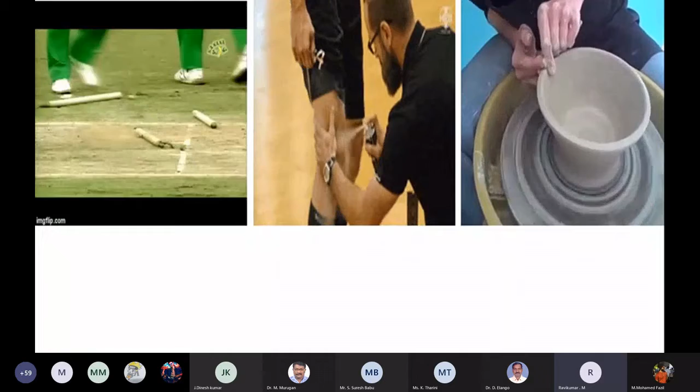So henceforth, your concentration should be more towards - not only towards the strength parameter - you should always focus towards ensuring or achieving the durability. Friends, another important term that I want to bring during this discussion or journey under this topic is serviceability.

And the quality. Friends, please keep in your mind the term quality is not only belonging to site execution. Friends, the term quality is quite common, or it should be ensured from your drawing room itself.

Because I want to recollect that the language of civil engineers is through drawings. So the communication between the designers or between the detailings and the site execution team will be through drawings only. So therefore, please keep in your mind, my dear young boys and girls, that drawing is the language of civil engineers.

So if you are able to deliver - I'm using the word deliver - with whatever detailing you have learned in your classroom, starting from engineering drawing in semester 1 or 2 till your 8th semester building drawings, then those are the things that are going to help you create more wonders in terms of whatever different types of structures you are going to deal with.

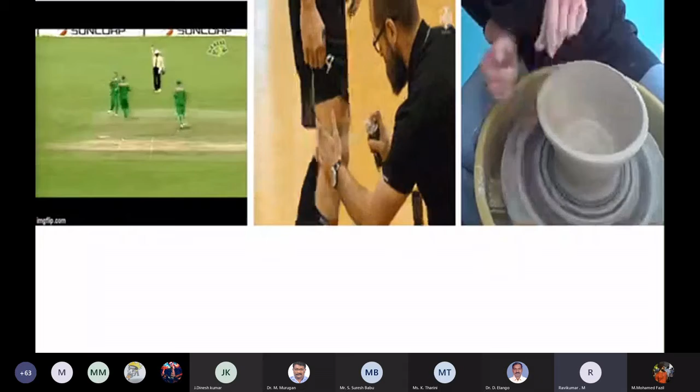So henceforth, after this journey in the next 1 hour under this topic, I always recommend to all my young engineers to study reinforced concrete design, steel design, or the creation of cross sections or detailing for buildings. Please refer to the respective code book, which should be parallelly referred. It may be IS 456, or it may be SP 34, which is the code that deals with reinforcement detailing.

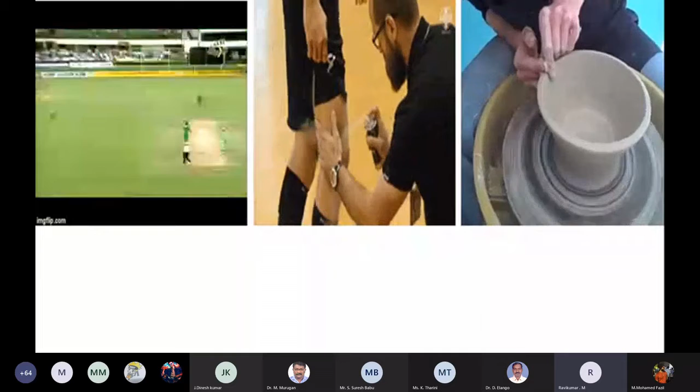So henceforth, I always say the students who spend more time in 2 L's - one L is for library and another L is for lab. The students who spend more valuable time in the library and the lab will be shining like anything, and they will be welcomed by the industry with a red carpet when you come out of your 8th semester, because the industry looks not only for marks.

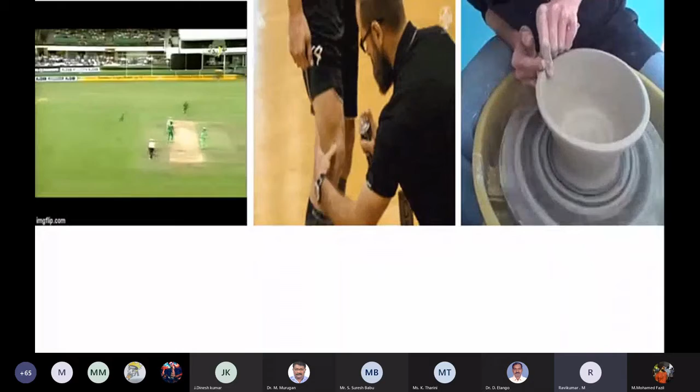The industry looks for skilled engineers. You should be skilled enough. When you come out as a product, you should be skilled enough to meet the industry. Industry doesn't want you to create wonders from day one. The industry expects every engineer coming out of engineering colleges to have the basic skill. So if your foundation is very strong, you will definitely shine in whatever field you enter.

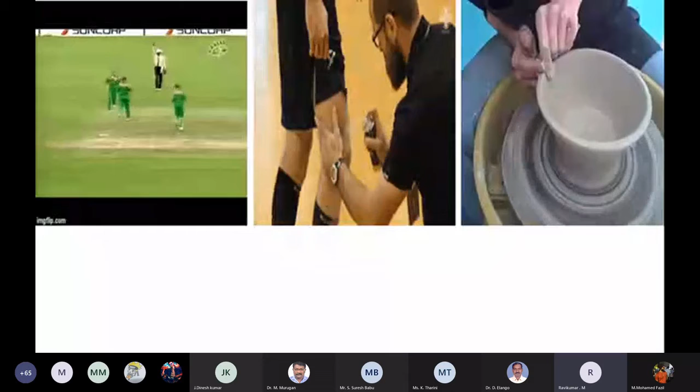So friends, with this brief introduction, I welcome each one of you to my session, Walk into Repair and Rehabilitation of Structures. Friends, in the first slide, you have 3 GIFs - one is a run out, another one is healing a sprain, and the other one is creating an object.

Friends, please keep in mind, under this topic of repair and rehabilitation of structures, you have to be very quick in identifying the problem. The timely identifying of the problem and timely curing of the problem will always ensure the design life period of the structure.

What is the design life period of a concrete structure? Can anyone say? Can anyone open the mic and say, please, my dear friends? Madam, can I raise this question to your students? Okay sir, with your permission, sir. Okay sir, okay sir.

Friends, what is the design life period of a concrete structure? A student responds: 50 years, sir. Don't feel shy, you should come forward whether wrong or right. See, the design life period of a concrete structure - earlier in the 1960s, 50s or 70s, the design life period of concrete was assumed as 50 years.

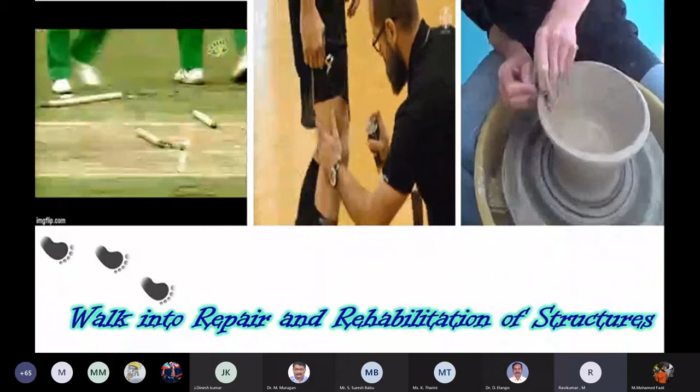Now we are designing bridges, infrastructure in front of your colleges, all the highway structures, bridges at the Vandalur junction flyover, even at the other rotary section at Tambaram, Sriperumbudur. I'm giving these examples so you can correlate, because every day you are crossing all these highway bridges.

So all these have been designed for a 100 years period. So if you want to retain that structure for 100 years of service period, your maintenance has to be ensured precisely. Maintenance means routine maintenance, periodic maintenance, and special maintenance.

So what is repair? Friends, these are two different terms - repair and rehabilitation. We should never mix these two terminologies. Friends, as an engineer, you should be in a position to differentiate, by seeing the distress or deterioration in the concrete, whether it requires repair, or rehabilitation, or a combination of both.

So what is repair? How can you differentiate these two terms, repair and rehabilitation? Repair is the process of restoring something that is damaged, deteriorated or broken to good condition. Friends, it is just something like you are sealing it. If you see a crack on a wall or a beam, you are going to seal it. You are not going to add any value addition in terms of strength. So repair is a process where you are restoring it, sealing the damage or deterioration and bringing it to good condition, that's it.

Now, whereas rehabilitation is the process of returning a building, a bridge, or any structure or area to its previous good condition. In the process of rehabilitation, you are involved in adding strength to the component, whether it's a beam, column, foundation, or slab. So when there is a process of adding strength to the structural components of a building, a bridge, or steel, that process is called rehabilitation. In both repair and rehabilitation, you are going to bring the structure back to its good condition, and it has to meet its intended design function. That should be ensured.

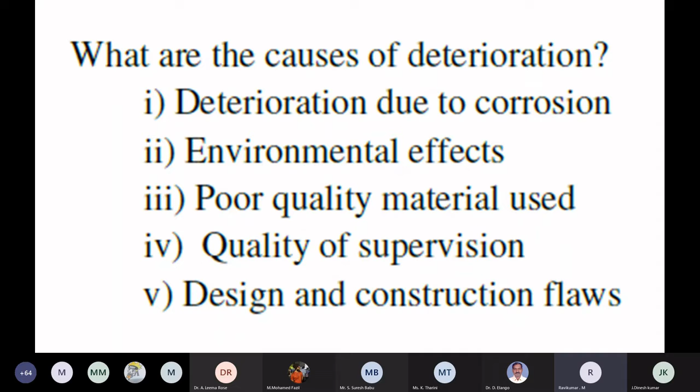So the first step is physical inspection. Please never make the mistake that even with 20 or 30 years experience, without inspecting the site, just by hearing the data or seeing photographs, you come to any conclusion. Please do a minimum of one visit. Spend adequate time at the site, understand the problem, understand the configuration and every detail. A minimum of one to two visits is essential.

Number two, preparation and documenting the damages, collection of samples, carrying out tests both in situ and in lab, studying the documents including structural aspects, estimation of loads, and estimate of environmental effects.

Sometimes you may be involved in designing a structure without understanding where the building is going to be executed, whether close to the seashore, close to an industrial area, in seismic zone 3, 4 or 5, or what the wind speed is. The designer has to be very thorough with all these details, and also where the foundation is going to come.

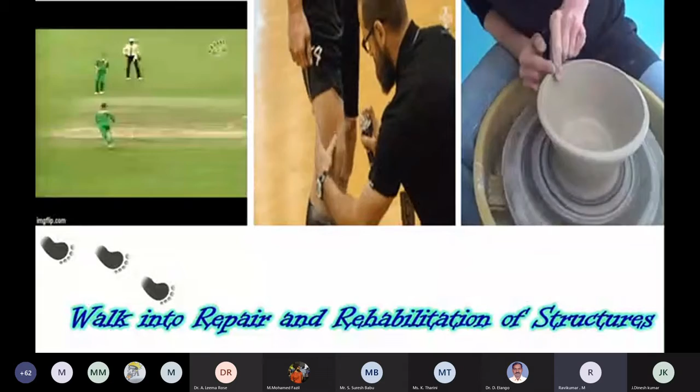But the cost, friends, is why I have shown this in the front slide. The third point is like pottery making - repair and rehabilitation is an art, A-R-T. It is a serious business, because you are going to retain the structure and bring it back to good condition, ensuring its intended design function. So costing plays an important role.

If the cost is exceeding, then sometimes you have to go for demolition and reconstruction, partly or fully.

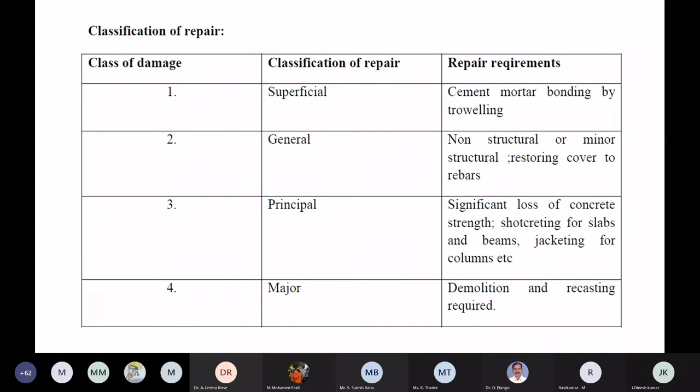Next, repair and rehabilitation of structures are carried out in the following stages: removal of damaged concrete, pre-treatment of surface and reinforcement, application of repair material, restoring the integrity of individual sections, and strengthening of the structure as a whole.

See the following factors to be considered while repairing concrete structures: one is the cause of damage, the source of why the problem is coming; then type, shape, and function of the structure - that is the configuration, load distribution, and purpose of the building.

Each and every data collection has to be ensured. Then the capabilities and facilities available with the builders - friends, you cannot tell customers that you can only deliver this much costly remedial measure and no less. You have to consider the capacity of the customer, what materials are locally available, and what mechanisms exist with the existing system. You have to come out with an effective repair and rehabilitation methodology that can work at site.

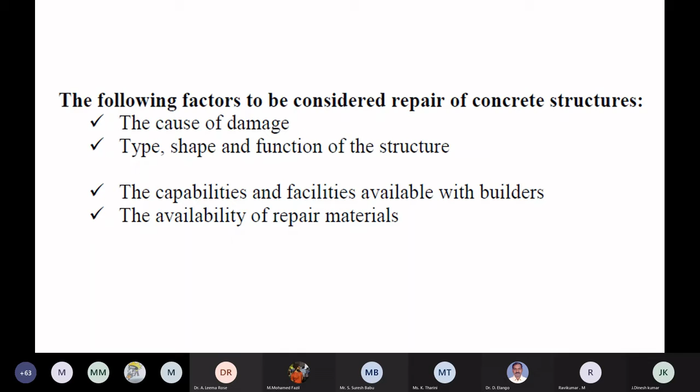Finally, the availability of repair materials. You cannot say you have to import - nothing doing. You have to develop a scheme that can work effectively within the data or system available.

Now I'll bring out some salient points in the concrete repair procedure: determine the cause of damage, evaluation of damage, identify the need and method of concrete repair, and application of the selected repair method. Friends, when developing repair or rehabilitation methodology or a combination of both, you have to develop various options with reference to cost.

There should not be any inadequacy in workmanship. Whatever step-by-step procedure you are evolving has to be ensured at site by the engineer in charge.

Then the method of repairs - as I said, not all cracks are structural cracks. Some cracks may be dormant cracks - even though there is a crack, it may be a facial crack with no impact on durability, serviceability, or safety of the structure. Some cracks may be active.

That means it does not remain constant width but opens and closes - whenever load comes, the crack may open and close. We call that active cracks. Another type is growth cracks, where the width keeps increasing with reference to time.

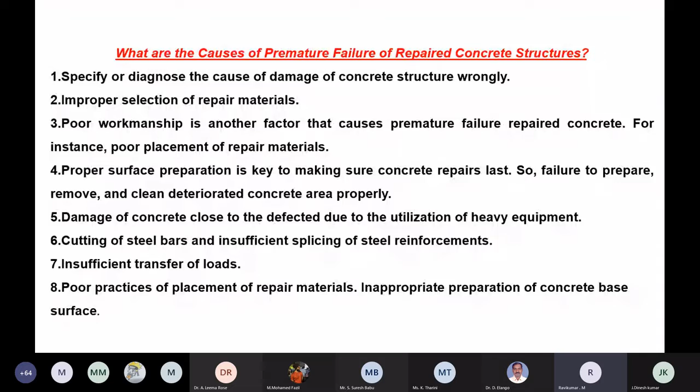Now, how does deterioration occur due to corrosion? One is spalling of concrete cover, cracks parallel to reinforcement, spalling at edges, swelling of concrete, dislocation, internal cracking, and reduction in area of steel reinforcement.

Sometimes you can see the crack developing along the reinforcement. Suppose in case of a column, the crack may develop vertically downwards, meaning it develops along the main bar. Sometimes circumferentially also, that means along the stirrups. Even in a beam, along the main bar, that is perpendicular to the neutral axis or parallel to it, the cracks may develop.

Sometimes the spalling of concrete may take place. So when you look closely into the exposed reinforcement, the rebar may be corroded. Because friends, when corrosion starts in the reinforcement, the volume increases 5 times. So when the volume of the steel increases due to corrosion action, tension is developed along the length. Because the concrete is weak in tension, the crack develops along the length of the bar. And since the volume increases due to corrosion, it pushes the outer concrete, that is the cover concrete. That's why you are seeing the spalling.

Now we will see a small video. Friends, if you have any doubt, you can please put your questions in the chat box, or you can raise your question at the end of the session. We will see a small video that will help you understand the process of corrosion, because corrosion is an electrochemical process.

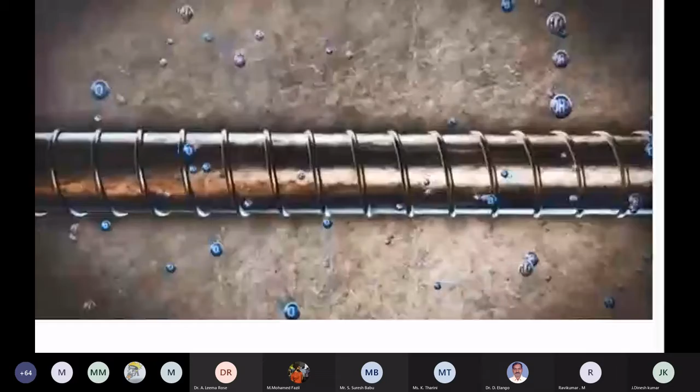See, I'm just keeping silent, okay?

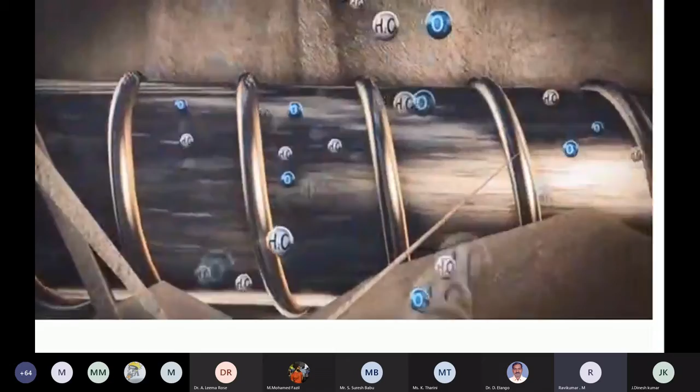So, the volume of steel increases due to the corrosion action, and it pushes the cover concrete, and tension is developed along the length of the corroded bar. So immediately cracks develop, and as the volume increases, it pushes the outer concrete. So you will be seeing cracks and spalling of concrete. You see, now the concrete has spalled out, due to the action of corrosion.

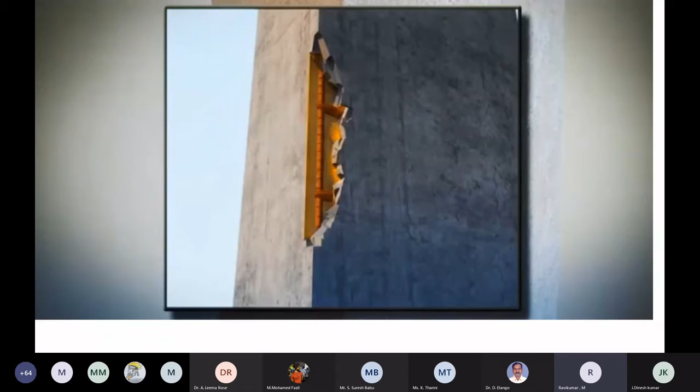I hope this video would have helped you understand better about the corrosion. Now the next thing is about the carbonation effect. What is carbonation effect? It is the effect due to carbon dioxide.

My dear friends, the pH value of the concrete is just like your immune system. In the present situation, you are being advised to keep your immunity high to protect yourself from microorganisms or infection. The same way, the pH of the concrete protects your structural steel which is embedded within it, from environmental effects or from the carbon dioxide effect. The new concrete will have a pH value of 12.5 or 13.

But once your concreting is completed and the shuttering is removed, it is exposed to the environment or atmosphere. So from day one onwards, the environmental effect will keep attacking your concrete surface, first attacking the surface concrete. If you are not maintaining a uniform cover all along the length of the bar on all sides of the member, wherever the cover is inadequate or less than the designed required cover, those areas will get affected very easily, and the rebar will corrode easily.

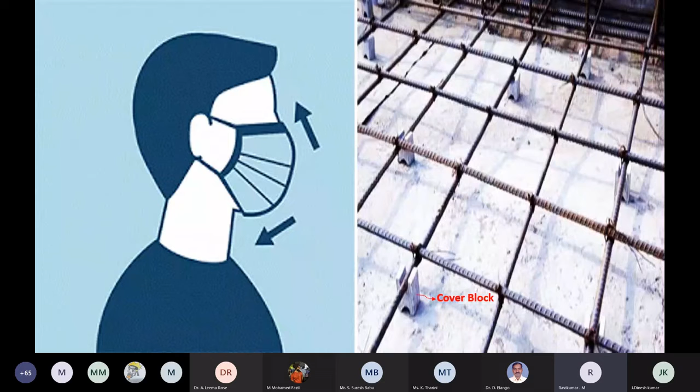When you are providing your cover block adequately at the adequate location, then your concrete will not be easily affected by the environmental effect. Whereas, even though you are wearing a mask, but partly wearing and partly exposed, you will be easily infected by microorganisms. The same way, even though you provide cover block, if it's not at adequate locations or numbers, and not maintained uniformly, at some location 40mm, 50mm or 30mm is maintained, at some location it's only 10mm or 5mm, then those areas having very less or inadequate cover will easily get infected and the problem starts.

You can see this, how the rebar are getting corroded.

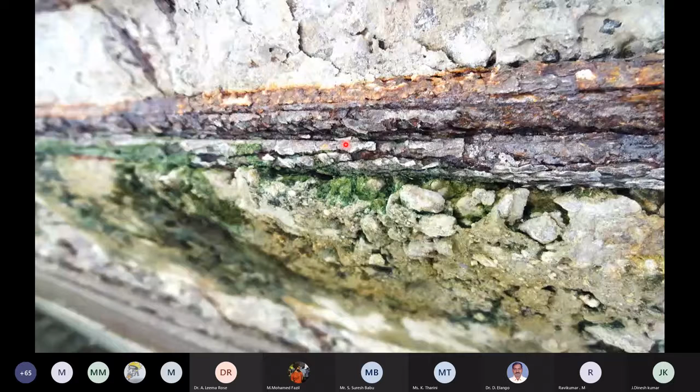See, you can see here. Sometimes you may see a peeling of concrete. If you just take a small stainless steel scale, 1 foot scale which you use in your drawing room, and push it into this peeling concrete, you will see the exposed corroded bars. You can see crack development along the reinforcement.

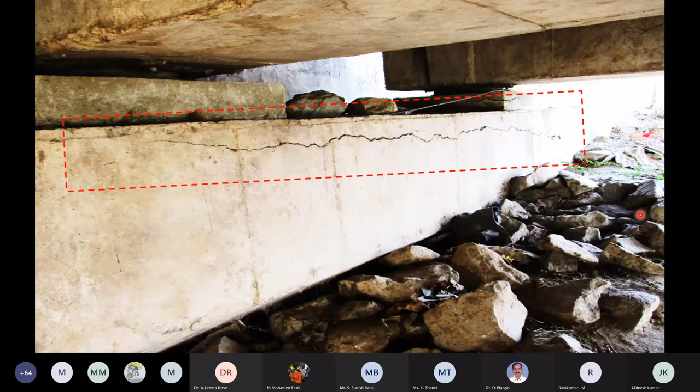The next problem is leaching, sometimes called lime weeping. It is caused by water leaking through the concrete. Concrete already contains calcium hydroxide. When it gets dissolved in water and exposed to carbon dioxide, this calcium hydroxide reacts with the carbon dioxide in the atmosphere and forms calcium carbonate. On evaporation of the water, you will see white patches, white salt deposition on the surface of the concrete.

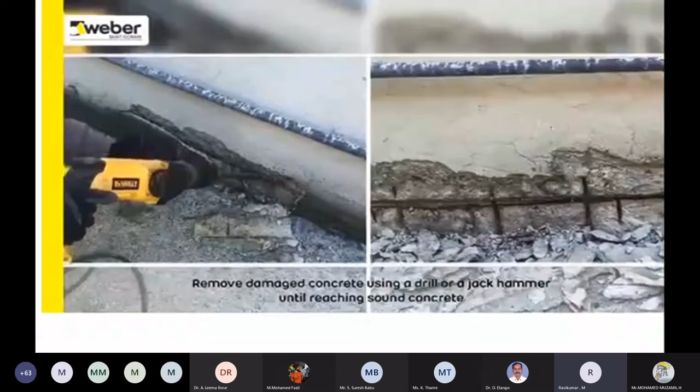See, sometimes in the video some chemical manufacturer may be seen. Why? Because at the student stage you should also be aware of the different manufacturers available in the industry who are producing various repairing products. So this video will be showing you or facilitating you to understand how to repair your corroded bars.

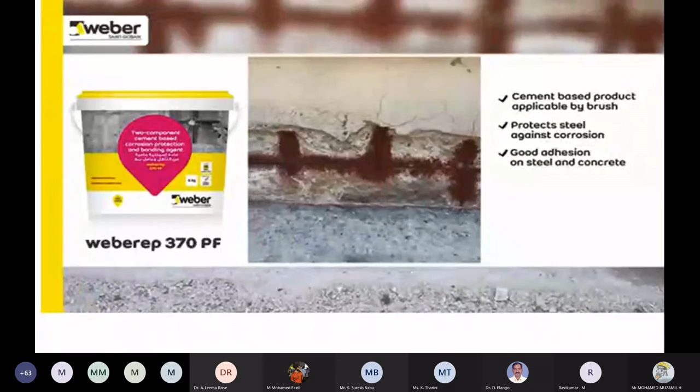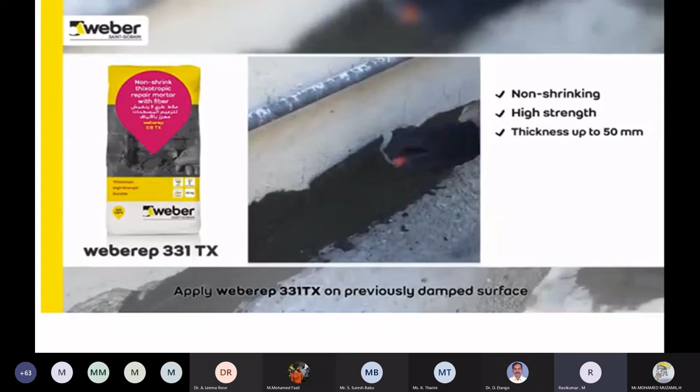One of our friends has asked how to determine whether a crack is a structural crack. It's very simple. As I told in the discussion earlier, you have to first measure the width of the crack and the depth of the crack. These two parameters will help you identify whether the crack is a structural or non-structural crack, along with the pattern of the crack, that is mapping of the crack, and also the depth of the crack.

You can ask me, sir, the width of the crack can be measured through a crack microscope or crack scale measurement. How can I measure the depth of the crack? With the help of ultrasonic pulse velocity equipment, you can identify the depth of the crack. Or you can even take some core samples perpendicular to the crack and identify it.

Suppose you take a core sample of 40mm, and your crack has propagated only 5mm or 10mm, then the cracks are well within the cover concrete, so you need not worry. But if the width of the crack is more than the codal allowable crack width with reference to your environmental condition, then you have to take a call on repairing the cracks, because grouting is a methodology where you are injecting a chemical material to seal the crack. That's all, you are going to seal the crack, nothing else.

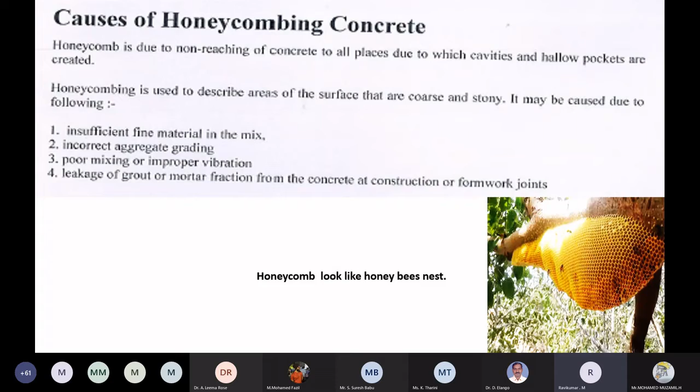So, you can ask me how this slide will give you more details of honeycombs. Now, how will I treat the honeycombs? The procedure is: you have to chip off all the loose concrete materials till you reach the sound concrete - I am using the word till you reach the sound concrete. Then you apply a bonding agent, then you apply your repairing material.

Friends, if you are not reaching sound concrete, the recurrence of the problem will come. So till you reach sound concrete or good concrete, you have to chip off all the loose material. You need a bonding agent because the old parent material and the new repairing material have to stick together, bonding should be there, it should not act like two independent materials. Bonding agents are available in the market from manufacturers like Fosroc, Sika, BASF, and many others, under different brand names, just like paracetamol tablets are available as Crocin, Dolo, and so on. Sometimes preparation of the parent material may be done by spraying water to make it wet, that also can be done. But without a bonding agent, never do the repairing work.

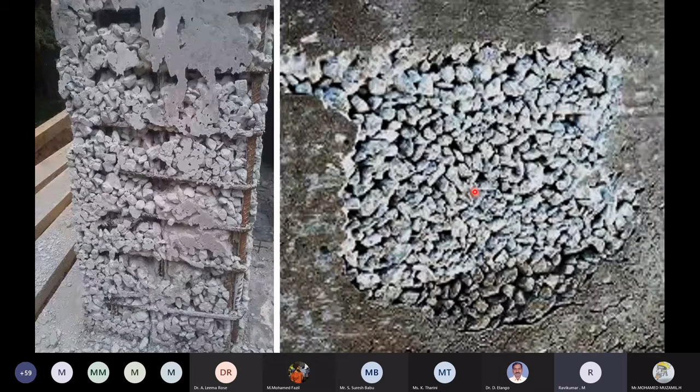Strictly speaking, whenever honeycombs are observed in concrete, the affected area should be broken and the portion should be reconcreted after applying grouting chemical to the old surface. That means a bonding agent has to be ensured.

Friends, regarding usage of the bonding agent, I am spraying the bonding agent. Okay, fine, within how much time do I have to apply my repairing material? That's another question. Before the bonding material becomes hard, it should be in a sticky form, and you have to apply your repairing material before it becomes hard. The example can be given like when you are pasting cinema posters on a wall, you prepare some glue - that stickiness has to be there before it gets hard.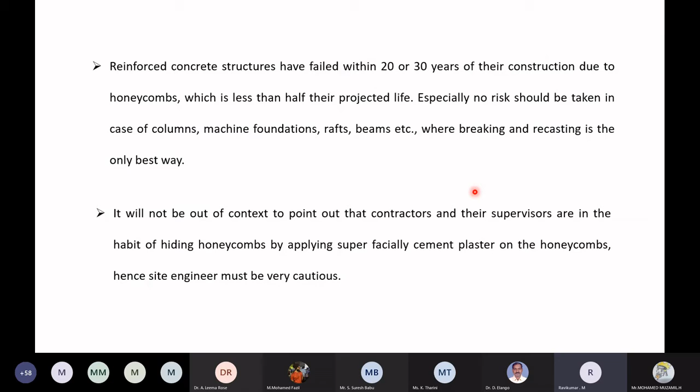Even the presence of honeycombs will lead to corrosion, because honeycomb is something like welcoming the effect of environment, welcoming penetration of moisture, welcoming penetration of carbon dioxide inside the rebar, and converting good steel into corroded steel through the process of corrosion. So honeycombs always reduce the load bearing capacity and reduce the strength also. So when you're treating this, please don't forget, you have to chip off all till you reach the sound concrete - that is the most important step you have to do.

The next is scaling, that is washing off the surface material, only exposing the aggregate. Whenever you come across this, immediately you have to repair and seal it, so that when the aggregates are exposed, the effect due to carbon dioxide or moisture penetration will take place very easily, causing corrosion. So quality control, we have discussed this earlier.

Now we will see another video of how to groove cut the crack. Whenever you are involved in crack groove cutting, it should be in the shape of a V shape.

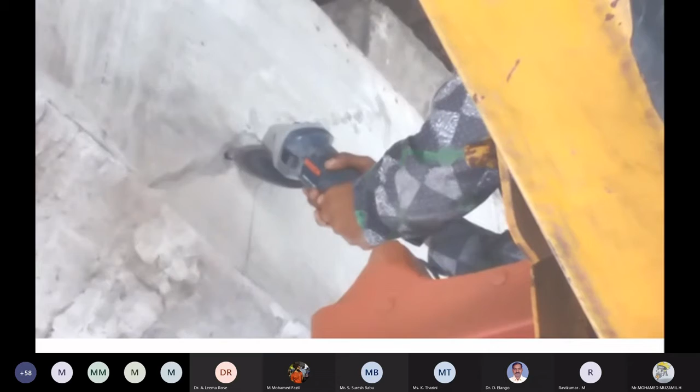Sometimes, friends, when you are doing V-groove cutting, there may be some hollowness there, you can see some voids. That means those areas will be having some honeycombs, so those areas have to be chipped and repaired properly.

Now we will see a small video of repairing a crack through a material called Sika product. These are the various different manufacturers available in the market to treat these problems.

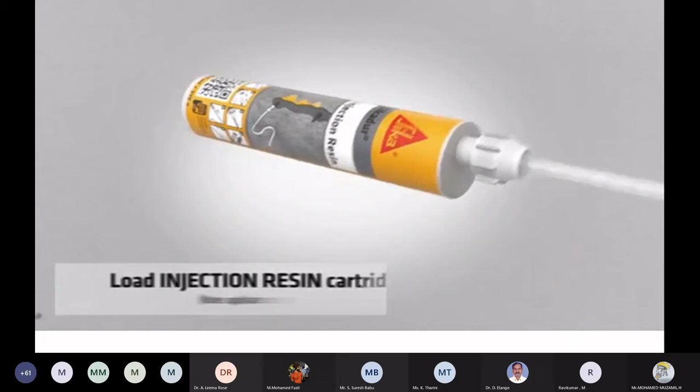See why, here they are using this first before injecting the grout material inside the crack. Why are they creating an outer protective layer? It means when you are injecting, the material should not come out. So you start injecting. Friends, for this injection material you can use epoxy resin or you can use PMC, polymer modified cementitious mortar. But epoxy resin will always have added value because this epoxy resin is a low viscous fluid.

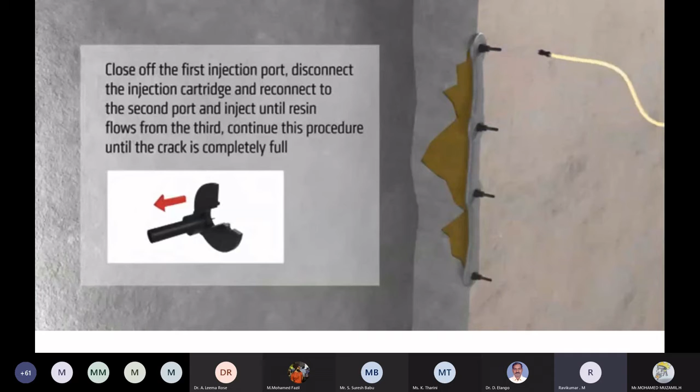So during the repairing procedure also, you have to follow the curing period as prescribed in the data.

We'll move on to next. Now comes the strengthening part, that is, you are going to add strength to the component. So the strength can be added through different mechanisms - one is, you may be hearing the term jacketing. Then next, presently the usage of fiber reinforced polymer system, FRP system, is widely used on site because the workmanship is very easy and you can complete it within the time and achieve the designed strength very easily.

It requires only surface preparation, it doesn't require any damage to the existing system. Just like how you paste a courier cover with tape, it comes in the form of a cloth, like how you see cloth in a cloth store rolled up - the same way it comes in a sheet form.

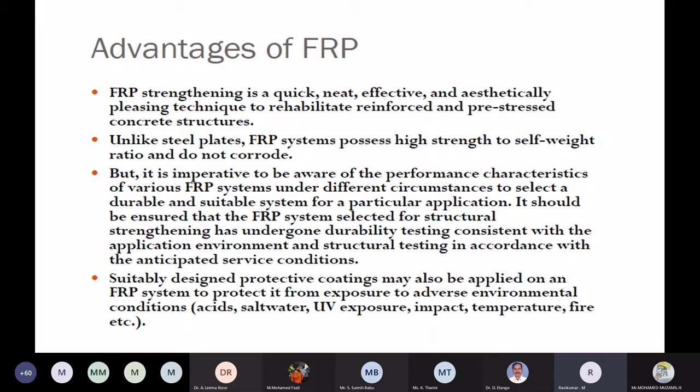Let's see a small video of usage, of why we have to go for FRP.

It is not necessary to use only Sika product. You can use Fosroc, BASF, or any other product.

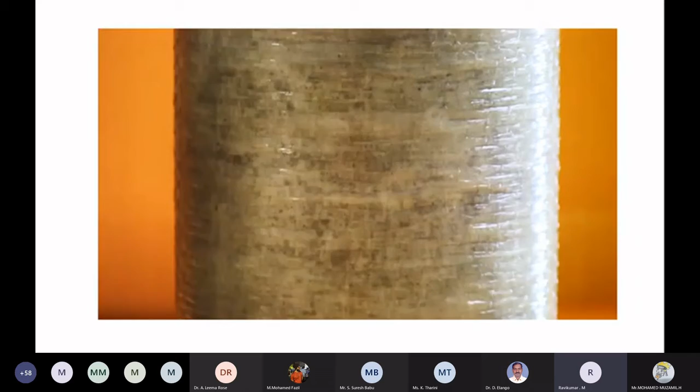This video is going to help you understand the difference between a cylinder without FRP wrapping and with FRP wrap.

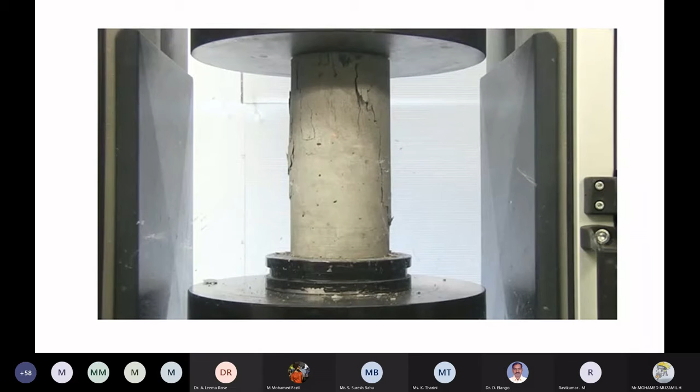Now the cylinder without the FRP system is undergoing the compression test.

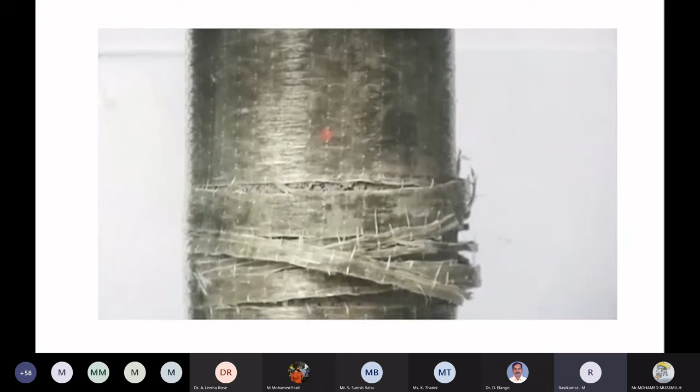So the value is doubled when you use the FRP system. That is why in present cases, for easy workmanship, to complete very quickly, and to achieve the desired strength, nowadays in most rehabilitation systems, the FRP system is preferred.

But the most important thing is the engineer in charge should be well aware in which direction the strengthening has to be made. If you are going to add strength value in terms of flexure, the wrapping should be made in that required direction. If you are going to add value in terms of shear strength, the wrapping has to be wrapped in the direction of shear. So the orientation of providing the FRP system is very, very important. This slide describes that orientation with reference to what type of strength is required.

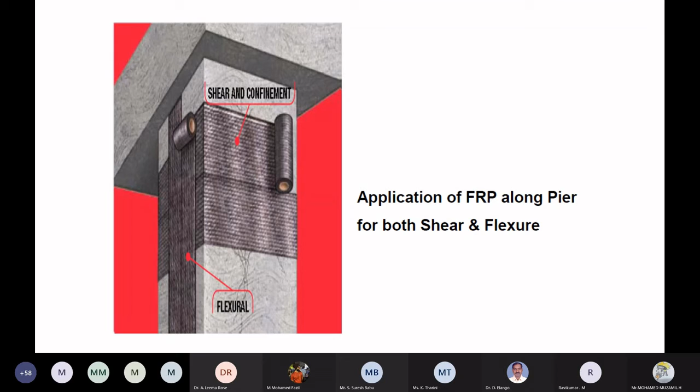Similarly for our slab, this is another video showing how to use these FRP laminates.

Ma'am, only 2 to 3 videos, madam. I will complete it, madam. Okay, sir.

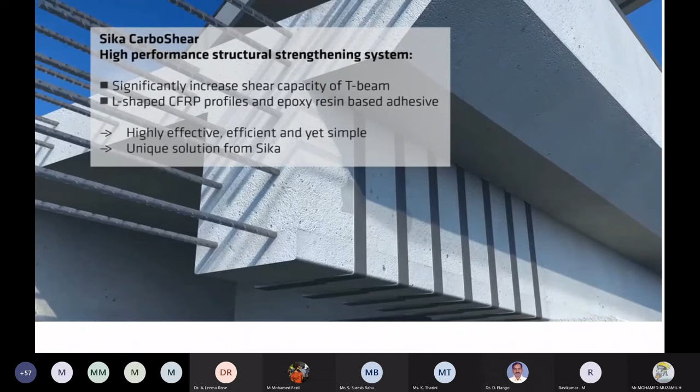Here the beams are going to get the value addition in terms of shear.

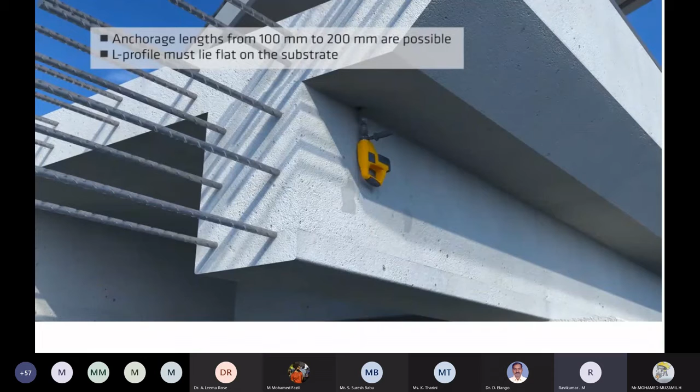Friends, here you can see holes have been created, provision has been created for anchoring the FRP laminate into the slab.

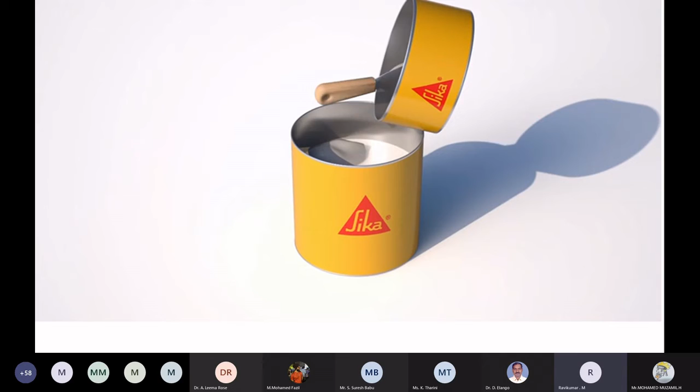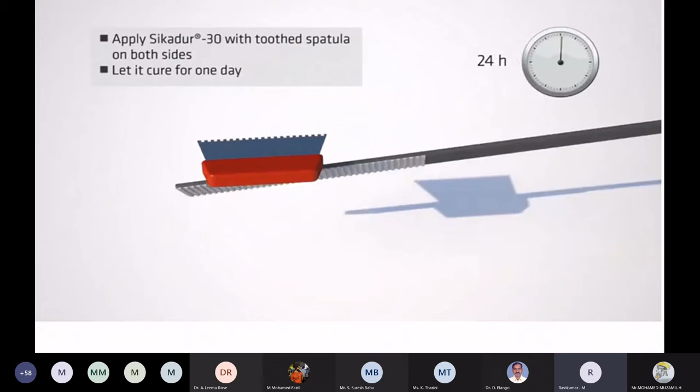This is what we call surface preparation. Then this is called mixing of the material. The mixing has to be done using a mechanical mixer - it should not be mixed using a stick or by hand. The material should be thoroughly mixed, because the laminate should be pasted over the primer. First one layer of primer, then the saturant. Between the primer and saturant, if the material specification data sheet specifies any cure period, that time has to be maintained. Then after providing the saturant, your laminate has to be pasted, because the bonding between the laminate and concrete will be through these layers only.

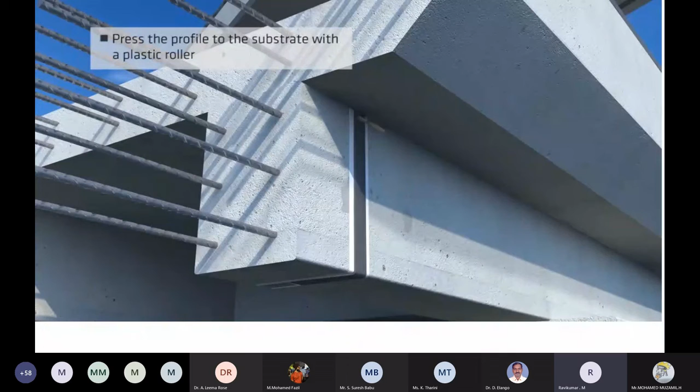Whenever you are involved with this type of material, all the products should be of the same brand. If you are using Sika laminate, the chemicals for pasting should also be of the same manufacturer. It is something like how you've been asked - if first vaccination is Covishield, the second dose should also be Covishield. If the first is Covaxin, the second dose at 28 days should also be Covaxin. It should not be one dose Covaxin and one dose Covishield, because even though both are vaccinations against that viral infection, the chemical combination is different.

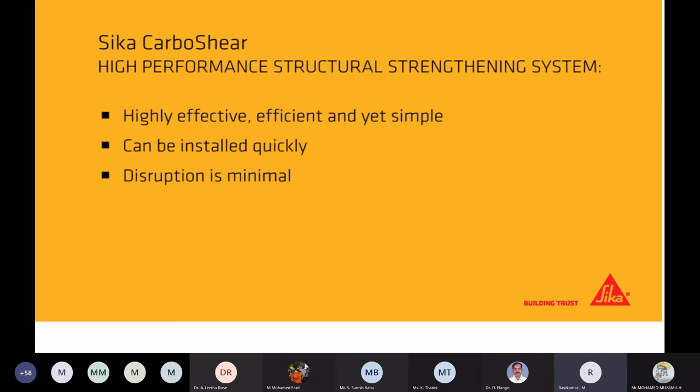That completes the FRP discussion. Now the next rehabilitation methodology is through steel bonding, steel plate bonding.

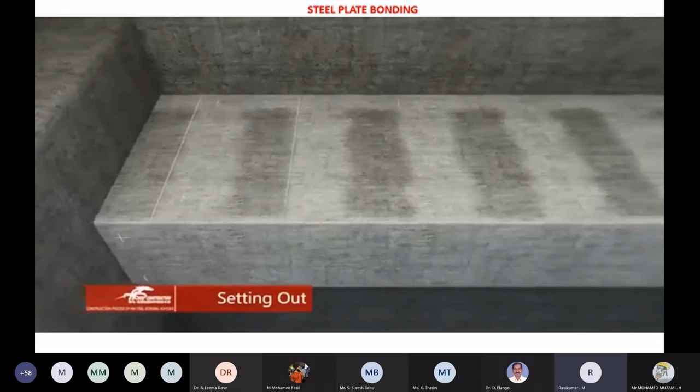I am explaining with videos and photographs so this will always help you understand the concept. The steps involved in the various mechanisms of repairing and rehabilitation can easily be understood. When you gain this knowledge, you will gain expertise in the area of repair and rehabilitation, and you can easily move forward.

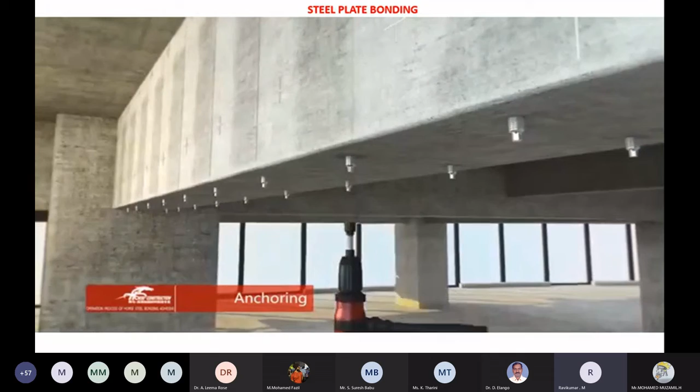Whenever you are involved in the action of drilling, you have to ensure that the drilling action does not disturb the existing structure or cause damage to the reinforcement inside. To avoid conflict between the drilling hole and the existing reinforcement, you have to use a Profoscope or cover meter, which is a scan equipment. Refer to the IRC guidelines for repair, strengthening and rehabilitation.

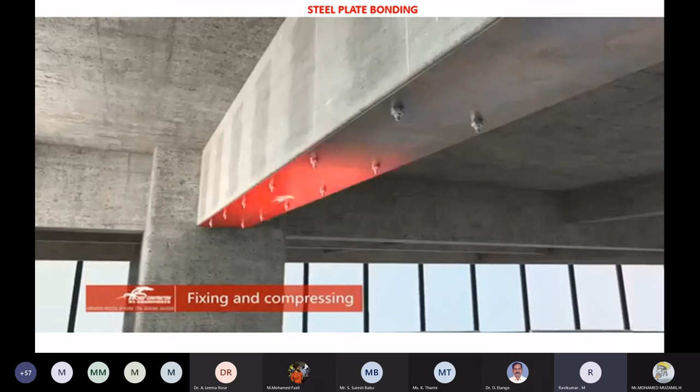The cover meter, if you scan from the surface, will show the reinforcement that is present on the surface of the member. It will not show the inner layer of reinforcement. This is called tapping. There should not be any void inside.

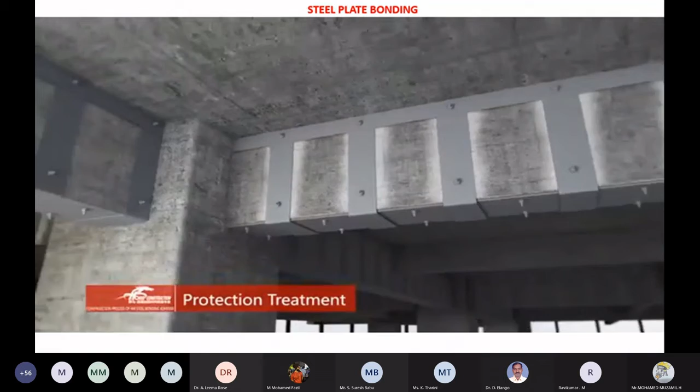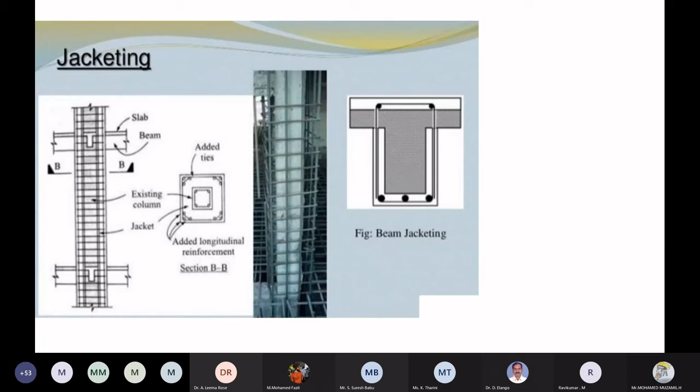But when you are using this additional reinforcement, it should be anchored meeting its desired designed anchoring length into the other concrete member. Now this video is about jacketing.

So this is all that we have seen so far related to rehabilitation, meaning you are adding a strength parameter. In repair, you are not going to add strength.

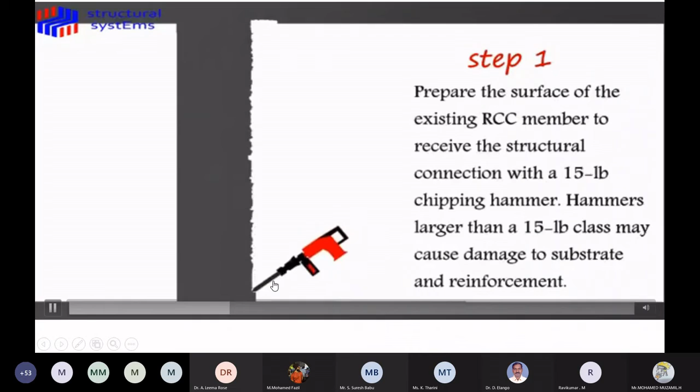So the first step is to prepare the surface. Second step, mark the new reinforcing bar location. If it requires anchoring, it should be drilled accordingly, and the drilling action should not cause any damage to the existing reinforcing system.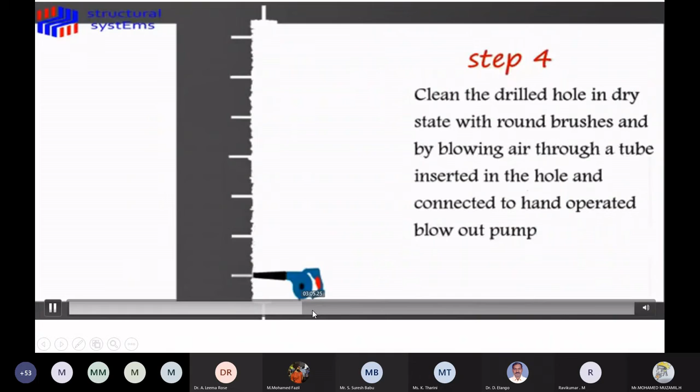Step 4, clean it by applying blown air so that no foreign particles are present inside. Step 5, inject the epoxy. Step 6, insert the reinforcing bar and allow the epoxy adhesive to cure. Step 7, fix the longitudinal and transverse reinforcement around the existing columns. Step 8, install and fix the formwork.

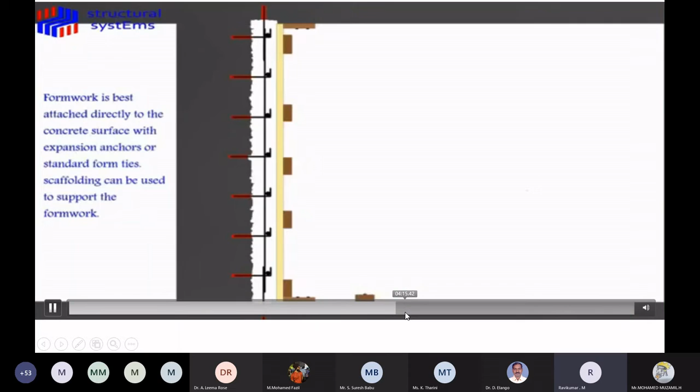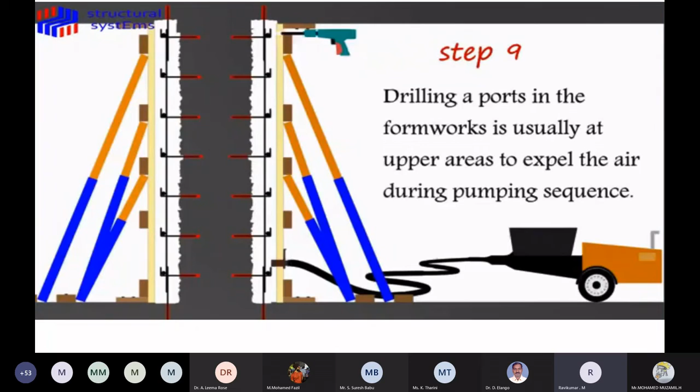There should not be any leakage during concreting, and even during concreting the shuttering should not get damaged. Step 9, you have to provide drilling ports in the formwork. Here you cannot use a bonding agent, but it has to be washed thoroughly with water.

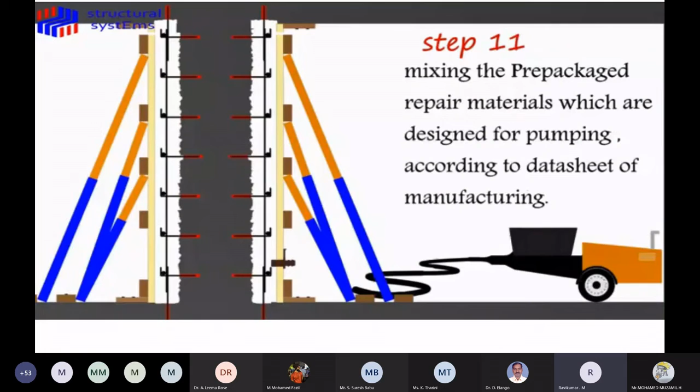To get a strong bonding agent, you should take advantage of pressurized water to clean the pores and saturate the prepared surface. Step 11, mixing the pre-packaged repair material. Friends, nowadays because repair and rehabilitation work sometimes involves a small quantum of work, in that case you cannot go for an RMC plant and get an RMC truck.

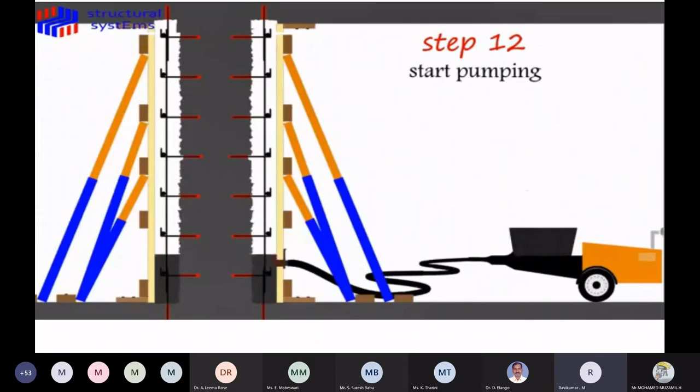So nowadays, ready-made packs of repairing products in terms of packets are available. You can even use micro concrete, that is GP2 material, which can achieve high strength within one day, say 25 to 30 Newton per mm square within one day.

Step 12, start pumping. So that's the end of the jacketing. Friends, this is the photograph I just want to bring to your kind attention.

What is the necessity of providing stirrups on the outer surface of the main bars in the beam as well as in the column? Friends, the definition between the beam and the column is this: immediately the answer will be that the beam is a horizontal member and the column is a vertical member. In addition to that, please add this point also.

In the beam, the load will always be acting perpendicular to its neutral axis, so it will undergo bending. That is why we call the beam a flexure member.

Whereas in the column, even though it is a vertical member, the load will be acting along its neutral axis. That is why whenever it is subjected to load externally, it will not undergo bending, we call it buckling.

So whenever an external load is applied, if you see the definition of Poisson's ratio, lateral strain by longitudinal strain, the object will always expand perpendicular to the direction of the load. If you take a beam and apply a load, the beam will undergo expansion laterally. Similarly, if you apply a load on a column, the column member will expand in the transverse direction, perpendicular to that load.

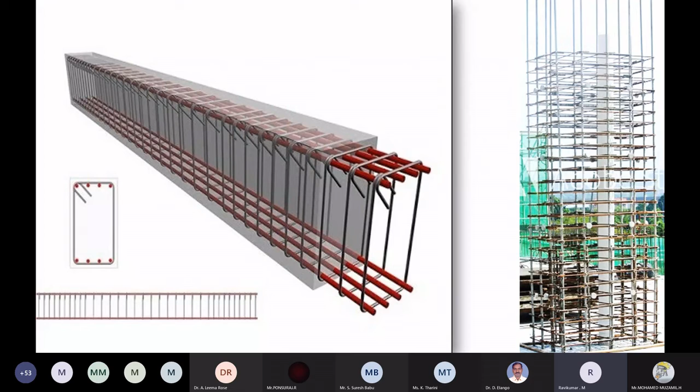Okay, I'm just correlating this photograph with this. Why are these wires bound on the outer surface of these wooden sticks? Why are the wooden sticks not tied on the outer face by keeping the wires inside? Please compare these two, both are the same.

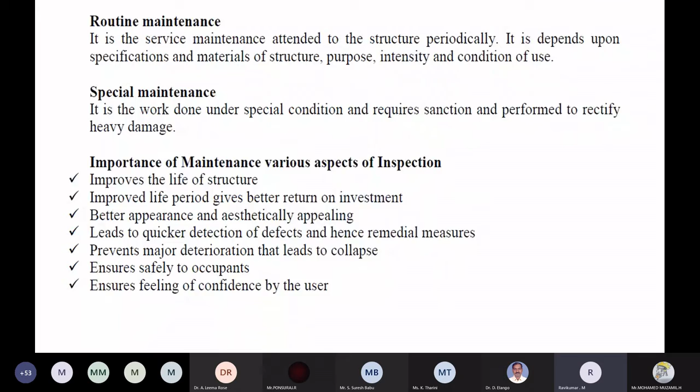So prevention and maintenance are separate topics. I'm moving a little fast. We have already discussed this - remedial work. Prevention is better than cure, so you have to do routine and special maintenance. All maintenance plays an important role in ensuring durability, serviceability, and safety.

So inspection plays another important role. You are going to play the role of doctors, examining in the same pattern. You have to examine your structures. In our portfolio, we use MBIU, Mobile Bridge Inspection Unit, to inspect structures.

So we have inspection - routine inspection, periodical inspection, pre-monsoon, post-monsoon. This slide describes the maintenance process.

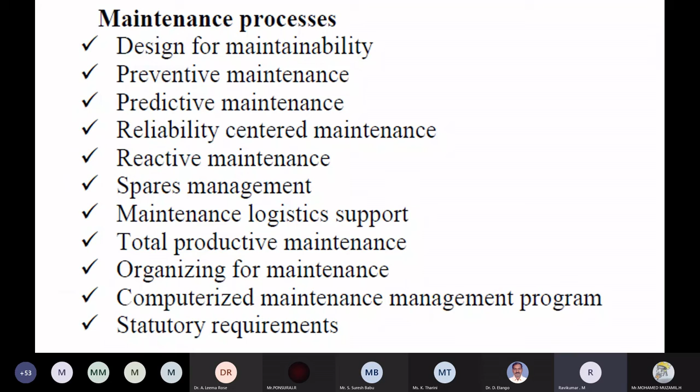When you inspect a building, you have to check the condition of wall paint, condition of paint on woodwork and grill, condition of flooring, roof leakage, etc., condition of service fittings, drainage, terrace, and growth of vegetation. Friends, growth of vegetation is strictly prohibited in any concrete structure because the roots will certainly affect the strength.